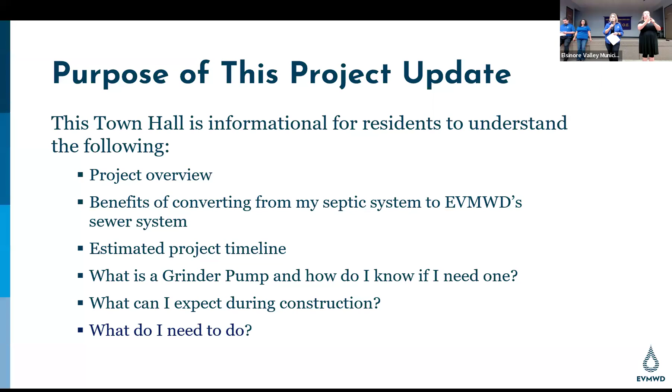So what I want to do right now is go ahead and introduce the project team. We'd like to start with our Elsinore Valley Municipal Water District board members. In the back, we have President Chance Edmondson and Vice President Harvey Ryan with us today.

From the Elsinore Valley Water District team, we have General Manager Greg Thomas back here in the corner, as well as Assistant General Manager Ganesh Krishnamurthy, and the Director of Water Resources, Parag Kalaria. From our technical team, we have Nelson Nuesca, our engineering manager, Joe McGee here with me, our principal engineer, who'll be talking to you more about the technical aspects of the project, as well as Brian Porcock in the back, our senior engineer.

EVMWD secured funding from the Clean Water State Revolving Fund, which provides low-cost financing so that we can move forward with sewer treatment, recycling, stormwater management, and sewer system projects. It allows eligible recipients to complete these crucial infrastructure projects and addresses all the water quality needs.

The funding is going to cover the cost of converting your septic system to the EVMWD sewer system. I can't stress enough that this is pretty much a once in a lifetime opportunity. It's rare for the state to provide funding for a complete install like what they're doing here for us today. So it is something that's very beneficial.

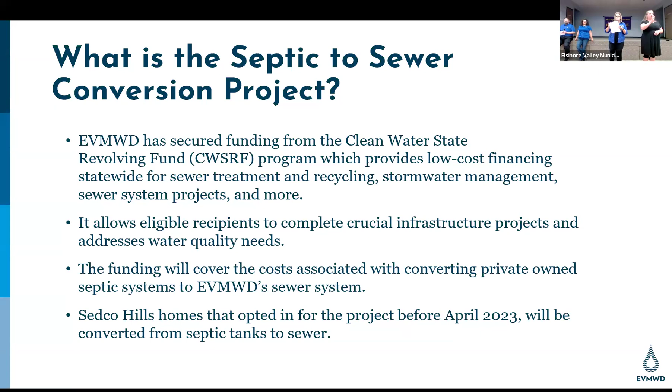So again, if you sign that opt-in form, that's why we received the information for today. All you have to do then is complete that right of entry form, which we'll talk about towards the end of the presentation. Now I'm going to pass this off to Joe so that he can go into the construction piece.

Good evening, everyone. Thank you, Christina. My name is Joe. I work in the engineering group. I'll be talking over some of the more technical aspects of the project, and I'm in charge of working together with our consultants to make sure this job is successful through design and through construction.

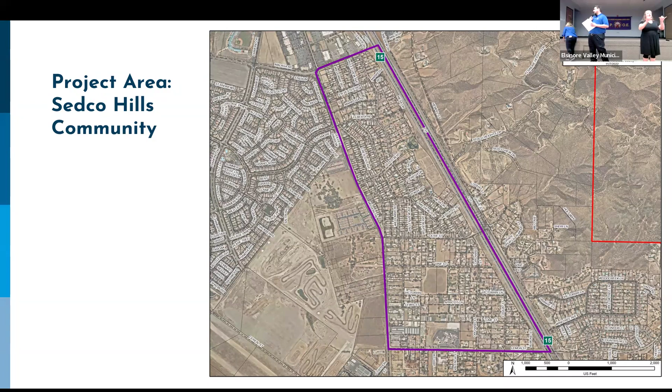So we'll start with, why is this project important? Septic systems leach nutrients and fecal coliform into the soil, which can contaminate the surrounding environment, including groundwater and surface waters. It really doesn't matter which type of septic system you have or utilize, each one ultimately percolates into the ground, which could cause that damage.

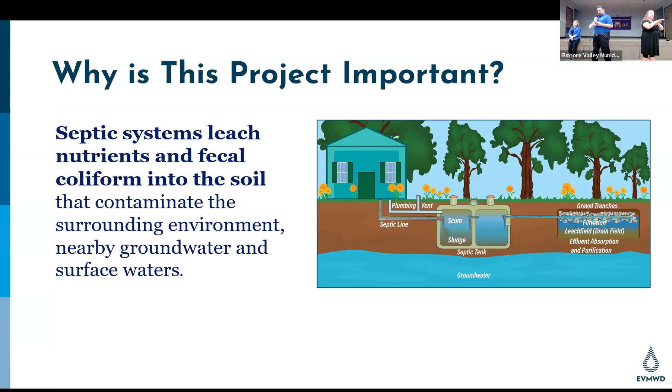Continuing on this point, just a quick description of a septic sewer system here. The wastewater flows from your house through the tank and ultimately drains into the soil and the groundwater, and potentially surface water, especially when many of these systems are in place over a small area, such as a targeted community like Sedco Hills and others that we had looked at. Ultimately, this water is percolating into the ground, contaminating groundwater.

If that groundwater is pumped by anyone, neighbors, or utilities such as ourselves, treatment of that groundwater becomes much more expensive, which of course affects rates. A gravity sewer system, on the contrary, is fully contained. It takes the flow from the homes into piping and conveys it through a sewer system, typically in residential streets and collector streets, to our treatment plant.

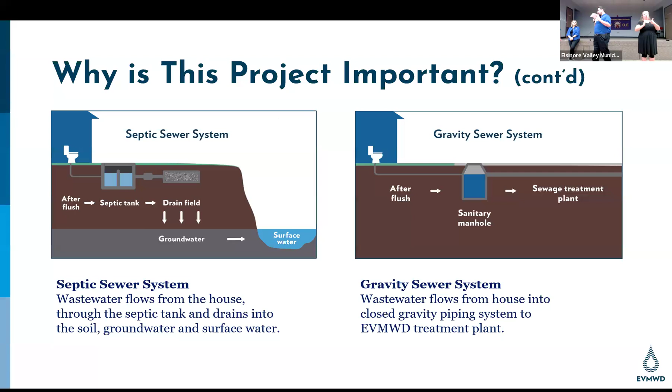So what are the benefits of converting from your septic system to the district's sewer system? Improved general health, by reducing exposure. Improved groundwater quality, like we just discussed. We can add more recycled water. Our treatment plant treats all delivery of septic system and sewer system flows to tertiary treated recycled water condition.

Reduced water pollution in general. Reduced septic odors. Increased property value now that you're on a gravity system or sewer system with a grinder pump, which we'll talk more about. You eliminate your septic system costs of maintenance and repair.

And a big one is, as Christina described, this is a big opportunity for the future. It allows you to make improvements to your property, which could include an ADU. Something like that, as permitted by the county, will require you to connect to a gravity system, which will be implemented as part of this project.

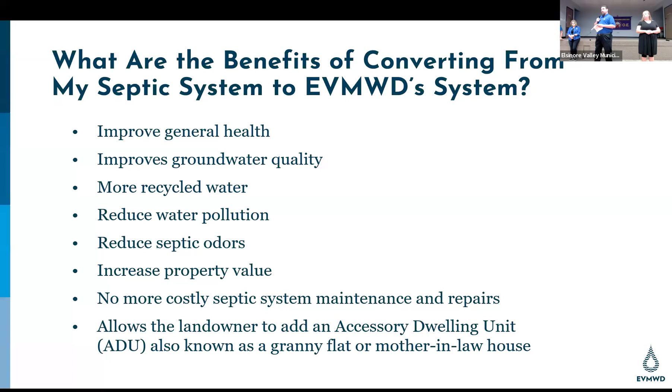Quick project timeline. I want to go over a few items here with you guys, ultimately showing the total scale of this project. We have across the Sedco Hills community about 40,000 feet of pipe, almost 300 manholes that need to be installed, and then of course all of the private property work, which includes your laterals and/or grinder pump tanks. We hope to go out as soon as possible.

What that's looking like is advertising for construction early next year. The very first thing that will occur is the street work. The next thing that will occur is the work on the properties, which will include your lateral and/or grinder pump.

I wanted to point out that typically you'll see in street work, you've seen it many times around town, whether it's on streets for street improvements or other utility improvements, it's what I consider heavy construction. You're going to see the big excavators or backhoes that are on the streets. You'll see dump trucks, you'll see work trucks. Once we finish street work, the property work will scale down greatly.

That will be much smaller equipment, including up to even hand digging, depending on how difficult some things are to access. Everyone's home will be treated differently on a case-by-case basis.

It's also important to note the number of notifications we intend to do. When we get our contractor on board, we are working hand in hand with the County Department of Environmental Health—they permit removals of septic tanks. We will be working together with our selected contractor to reach out to everyone involved in the project, coordinate the on-site work, which essentially means we're going to set up a time, visit the property with you, figure out and finalize the alignment of our lateral, and do a reporting of your septic system. The county requires all of this to be provided to them in writing.

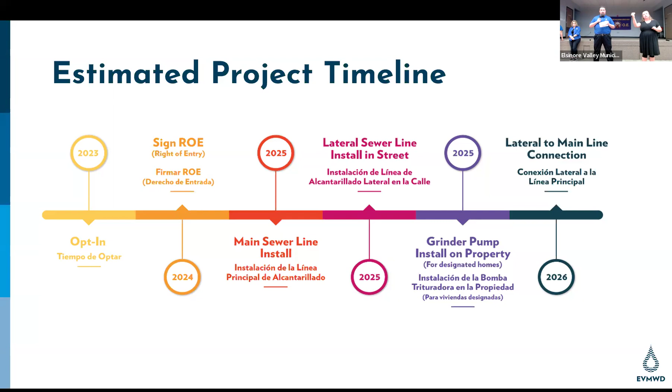So what specifically are we going to do on your lot? To connect you into the gravity system within the street, we have to do several things. Primarily, get rid of the septic tank, which by county standards is to destruct it. There are several manners in which we can destruct a tank—it depends on its condition and its material. That will be dictated to us at the time of observation and by the county inspector.

Then we have to connect the actual tank area, once it's eliminated, to your house via the new lateral. So essentially, we're going to pick up the lateral that used to discharge to your tank, wrap it around wherever it may be—front of the house, back of the house, side of the house—and route it out to the street and connect it into the new piping system within the street.

If your lot does require a grinder pump system, there's a second level of effort there. The grinder pump system requires an electrical connection, so we will also be taking a look at your electrical panel and making sure it has the capacity to receive this new system.

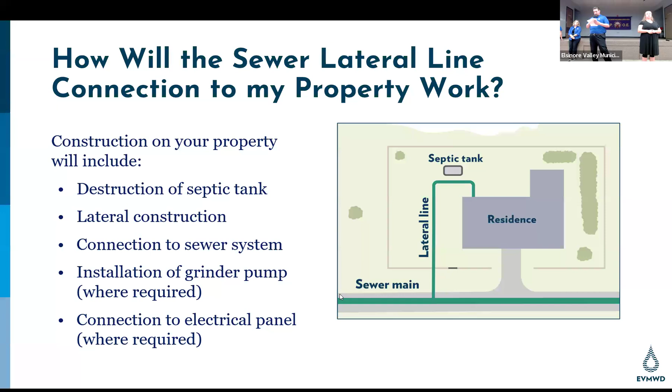So what is a grinder pump and how do I know if I need one? If you received information in your packet of outreach material, your lot was designated by the design team as very likely needing a grinder pump system. It's a wastewater pumping unit, used where gravity sewer service is not available. That's really just the crux of it.

I'll show you a profile view on the next slide. Typically what happens is if your home is low—specifically if your home is lower than the sewer pipe—that requires it. If your home is lower than the street, then you have a very good chance that you might be lower than the sewer pipe. The team has worked diligently throughout the design to try to minimize the count and the impact of this. But as you guys know well in your community, hills is in the name, so it gets tough sometimes to flow certain directions, and if it is uphill, it will require to be pumped.

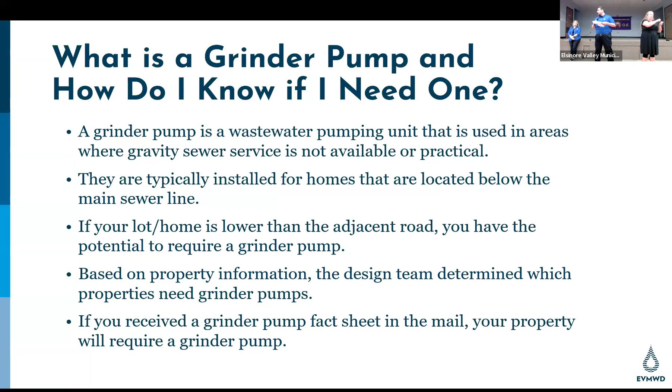It requires an electrical connection, which does mean there will be work on the property for the lateral, but also conduit for the electrical. If you take a look at the unit outside, there's also a control box, which we can step through with you—we'll find a good place for that. Most conveniently, it's mounted onto the side of your house, but it may be mounted near the grinder pump location.

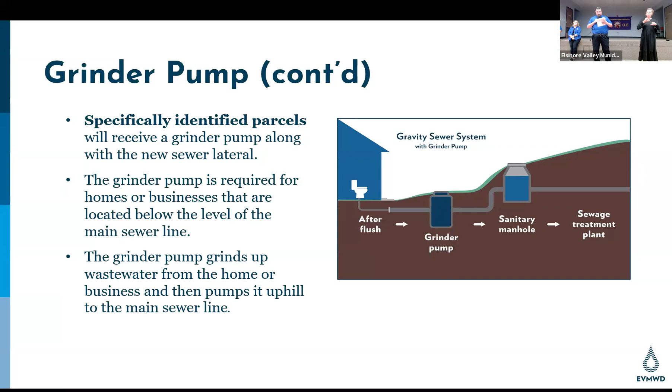And the grinder pump, very similar to a garbage disposal. Yeah, sorry, we already covered that. Next slide, I'll move on to the next.

So the project covers the full work in the street, like I described. It covers the lateral work, and it does include the grinder pump work, which includes the installation of the unit. The vast majority of the unit is below grade. All you'll see is the lid, which will protrude up a little bit to make sure you don't have overland flow from rain events filling up your tank and unnecessarily running your pumps. And then, of course, the electrical control box.

What we have elected to do as the district, because we understand this is a new system, it's very different from a septic system. A septic system has its maintenance challenges like we discussed, and a grinder pump system has its maintenance challenges as well. One of the ways we are hoping to ease that is to run what is called a duplex pumping system, and essentially what that means is 2 pumps.

What's outside is a duplex pumping system. There are 2 pumps, only one will ever need to run at a time. They will cycle back and forth to reduce the runtime. And in addition, if one goes down, the other pump will continue to operate, giving you plenty of time to work with a local plumber to have that addressed.

In addition, we're also maximizing our storage time in the actual containment vessel that you see outside. Those come in many different sizes. We've elected to try to size that for what it would be a typical family of 4 for a full day, because there are some concerns. This is a new system, so if the power goes out, you lose electricity, you lose pumping capacity, just like you'd lose your dishwasher or anything else.

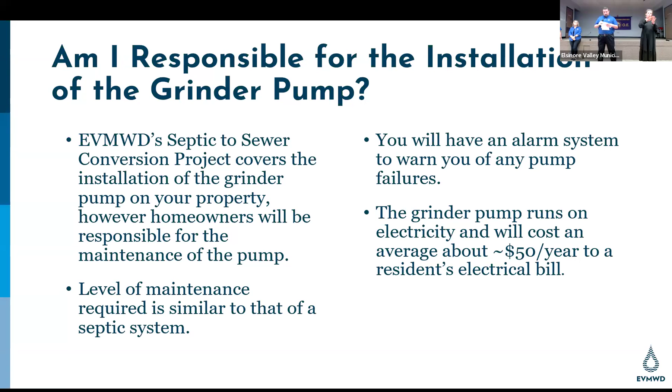So what can you expect during construction? Our community outreach team will be in communication prior to the start of construction, and at all those points that I described in the project timeline, we will definitely be in communication. You're going to hear a lot from us. And even when you see our selected contractor and their logo on the truck, we will be reachable.

If there's things that we need to discuss or work out, we will be there for you. But ultimately, once the project gets going, it's going to be just like any other construction project. It's going to be loud at times, it's going to be busy, it's going to be dusty, and it will be annoying. But ultimately, the end product is a great service to the district service area, to the homeowners, to your property value, and to the groundwater and nearby receiving waters.

There will be some parking impacts as well, potentially. As you know well, some of the streets are fairly narrow, especially if we want to run a big excavator through there to get a very deep pipe constructed. We'll work that out with you beforehand with plenty of notice that some cars may need to move, but that will be on a street-by-street basis.

And then, of course, as part of the lateral work, we have a lot of on-property work like I described. We'll need to make sure that the homeowner has cleared the path and made sure that we're successful in getting those pipelines or conduits installed as dictated by our plan and as worked out together during the permitting process. And that will include your breaker panel. If your lot has a grinder pump and we need to connect that for electrical service, we need to make sure that we can get to your breaker panel. If there's anything in the way, please make sure it's clear.

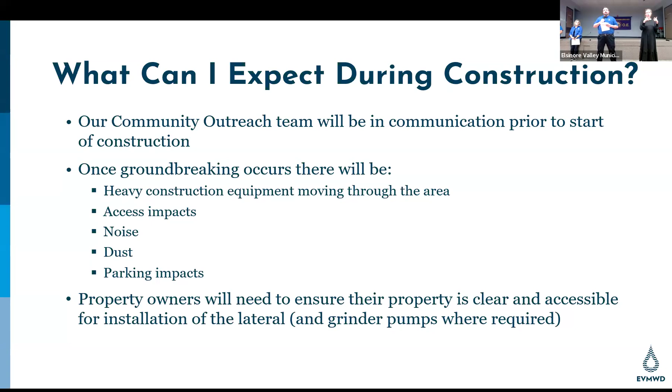Okay, so what we need from you as a property owner. Each property owner that's listed on the property deed is going to need to sign the right of entry form. You should have received in the mail a packet that included the right of entry form already pre-filled out with all the property owner name information, the APN, and a couple other legal details we needed to add. If you don't have that with you today, that's fine. We have blank forms and we have the information needed to fill them out.

Basically, that right of entry is a contract between you as a property owner and the district or government entity, along with all of our subcontractors, to allow us to perform the construction on the property. It'll include details regarding what type of work we're going to do and whether or not we need to enter the property and what noticing we need to do.

So for construction, one of the biggest things to know is we will not be able to start construction until all of the right of entries are received. So if you've opted in, that's great, but if we don't receive that right of entry form, we cannot complete the construction on your property. So it is very important that we receive that form.

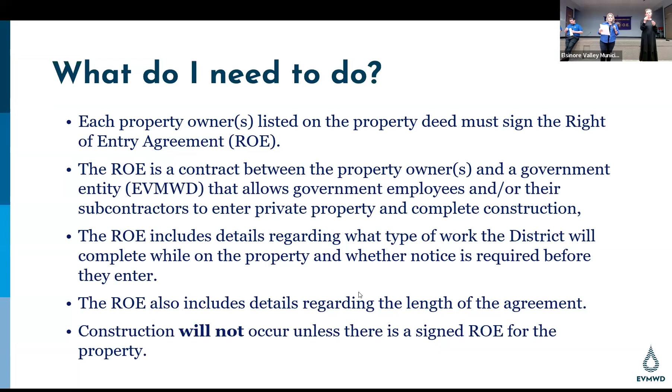They were mailed out to each property on the week of September 16th. Only completed right of entry forms are going to be accepted today. That means we need signatures from all property owners on the document, in addition to copies of government issued IDs for all the property owners included on the deed. If it is incomplete, unfortunately we're not going to be able to accept those today.

We're going to have you complete those, and then you can either mail them using the self-addressed envelope that was included in the packet to the PO box, or you can swing by the district office and drop them off there. We're asking that all right of entry forms are submitted to us by November 30th so we can proceed with the construction.

There's some information there in case anybody has questions at any time throughout construction. That is the construction hotline number, as well as the email address for outreach for all of us. There's my information, there's a project manager for the outreach portion, as well as the website that is specific to the septic to sewer conversion project at EVMWD.

Okay, so I know I mentioned that we weren't going to take any questions today, but if we have a little time, we will. We do have one question online. The question was, how will the contractors or construction workers know how my property looked like before construction, to make sure it looks the same after construction?